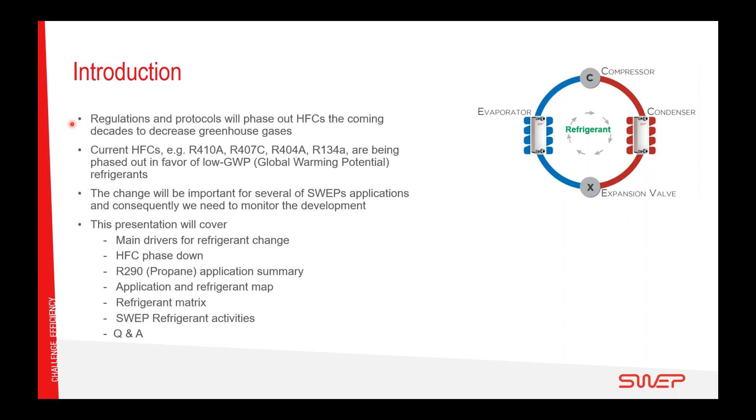If we start with the main drivers for refrigerant change, in Europe, we follow the Montreal Protocol and the Kigali Amendment, and that will drive phase down, and it's planned to phase down 85% between 2019 and 2036. However, in Europe, we also have the F-gas regulation, where we have an 80% phase down between 2015 and 2030. I will, in the next slide, cover this in a graph.

We also have the eco-design, which is valid 2018 and 2021 in 2 tiers. And this eco-design rewards high seasonal efficiency. It also rewards if you have a refrigerant below 150 and low water pressure drop. Everything contributes to lower emissions and energy consumption.

The EN 378 is the safety and environmental requirements regulating refrigeration systems and heat pumps. It regulates what type of refrigerant you can use and what type of charge and what type of safety equipment is needed. And then finally, but not least, the prices of HFCs, in particular 410A, 407C and 404A, have increased. They have topped, but remain on a high level.

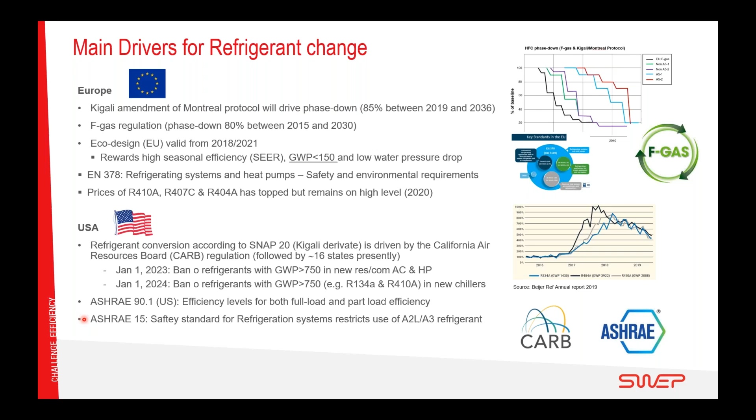Moving over to China, the overarching driver is once again the Kigali Amendment of the Montreal Protocol. And here it will be phased out with 80% from 2024 to 2044. So it's a different timeline compared with Europe and the United States. China can continue with 410A until 2029 for domestic use. However, low-medium GWP refrigerants are needed for export.

We also see that there is a clear policy direction towards low GWP refrigerants in China, and mainly we see use of R32 and R290. There is an efficiency standard governing COP and IPLV for water chillers, and there are also safety and environmental requirements for refrigeration systems and heat pumps.

In Japan, also here, the Kigali Amendment will drive the phase out. Also here, as in Europe, 85% from 2019 to 2036. We see that R32 will be used quite extensively until 2025, 2030, when it has to be replaced by new low GWP refrigerants.

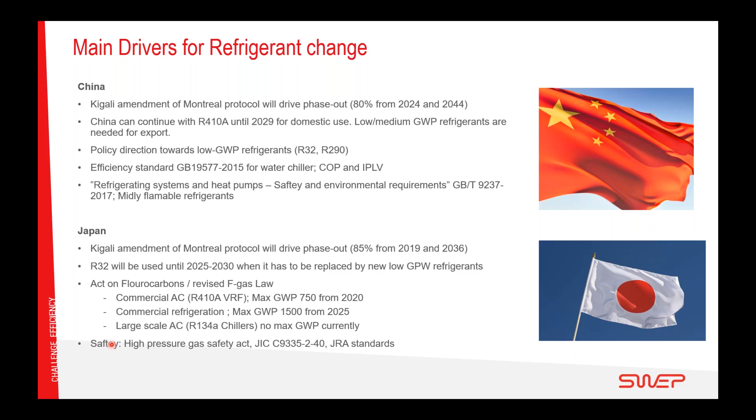And in this chart, we can see the phase down according to F-gas and the Kigali Montreal Protocol. The black line here is F-gas. Then we have the green and the purple is for Kigali non-A5 countries, so those are the industrialized countries. And then the blue and the red one is developing countries. And the reference here is 100%

2015, and that corresponds to a GWP of 2,200 in average. Moving down to 30%, we have a GWP of 650 in average, and at 10% or slightly below, a GWP of 150 in average. So if we try to summarize this, we can see with F-gas, which is the black one here, 2024, at this point, it will be difficult to use R32 and HFO blends, that is medium GWP, after 2024.

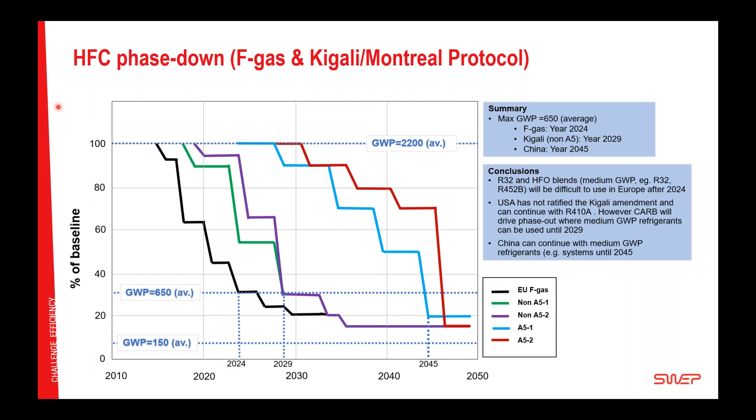Here is a slide on R290 applications, what we have seen so far. And R290 is the same as propane. And it's very much related to the charge of the system. If the refrigerant charge is below 152 grams, there are no safety requirements in the system. You can use it everywhere. And what we see today, it's being used for room air conditioners, like this one here, or in small supermarket display units below 1 kilowatt. And for the supermarket display units, they can be air-cooled, but we also see water-cooled units where a brazed plate heat exchanger is used. In the case of room air conditioners, there is no BPHE use.

The next charge level is 0.5 kilo. And here we see a quite clear trend towards supermarket display units, and that is water loops. Brazed plate heat exchangers are used as condensers. And in this picture, you can see a display unit. On the top of this display unit, there is typically one of these systems where you have compressor and a dual brazed condenser. And then you have a water loop feeding the condenser.

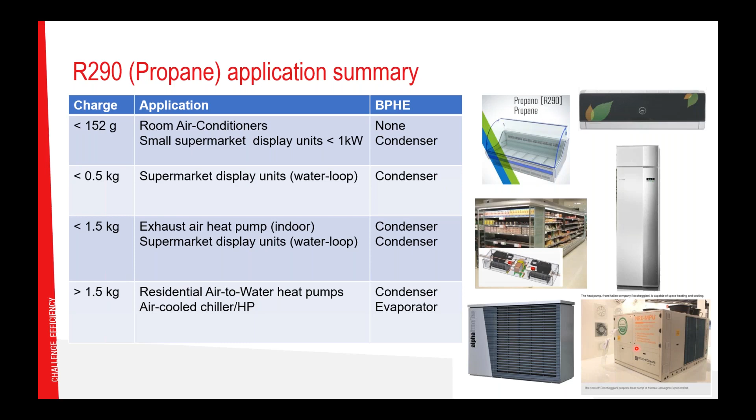In this application and refrigerant map, we have tried to summarize our view on different applications. I will not go through the full map. I will focus on 3 areas here. And the first is scroll chillers within the segment air conditioners. Typically, brazed plate heat exchangers are used as evaporators and condensers. Today, we see that 410A is still dominant, but in the short term, until 2024, we see that also R32 will become popular together with 410A.

We see some indications of 452B and 454B also used in systems, and then there is a possibility that 466A will be used until 2024. This is a new refrigerant developed by Honeywell, but it's not yet commercially available. But the main advantage is that it's an A1 refrigerant with no flammability. Long term, we still see that 410A is being used mainly in China and US. R32 used in APAC, Asia.

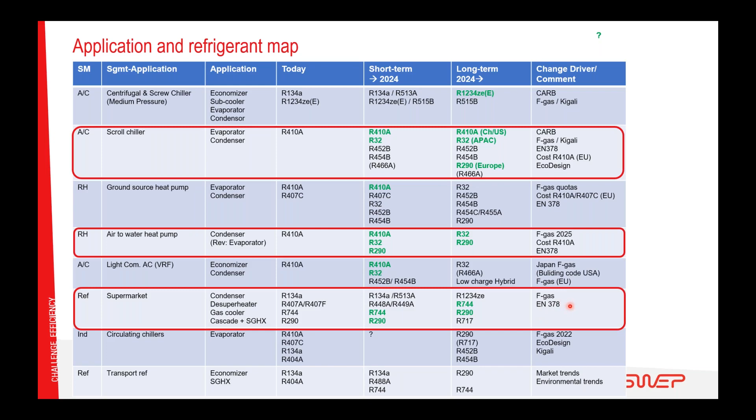In this refrigerant matrix, I've tried to consolidate the different candidates that are available. The dark blue is the reference in every category. So the first part here is low pressure refrigerants. Next is medium pressure, and then we have high pressure in 2 categories.

If we start with R134A, we can see that GWP is 1430. It's an A1, so it's non-flammable, medium pressure, 100 in COP and capacity. And it should be noted that this 100 differs from this 100. So this is valid together, those 3, and then these values here are for comparison.

So for example, we can see the popular refrigerant 1234ze has only a GWP of 7. It's mildly flammable, A2L. You get the same COP as with 134A, but only 75% of the capacity. And it's being sold under various names.

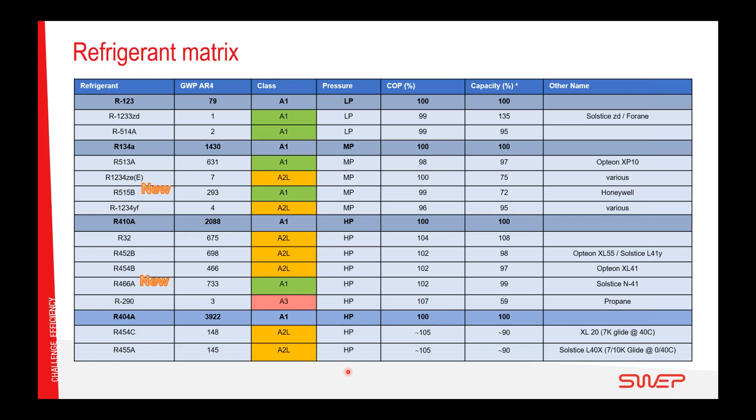So last slide, what are we doing at SWEP with regards to refrigerant activities? Well, at SWEP, we continuously monitor the refrigerant trends and development at our customers and other component suppliers. We have upgraded the laboratory in SWEP to handle R32, 452B, 454B, and propane. We have verified a number of BPHEs as evaporators and condensers for the above mentioned refrigerants.

And then we have also optimized evaporators to better perform with these refrigerants. Then the SSP G8 calculation software has been calibrated according to test data for accurate selections. And here you can see a screen from our selection software.